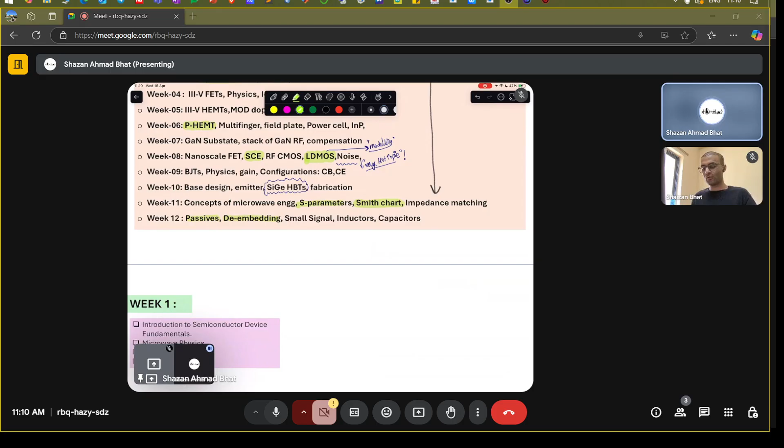Okay, so now let's say for example week one. In the week one we talked about introduction to the semiconductor fundamentals, which is again really essential to this particular course. So in this particular week, we talked about the band diagrams of the basic semiconductor devices. We talked a little bit about how you can draw those band diagrams and why those band diagrams are important.

You remember we talked about a lattice system, a one-dimensional lattice system. I'm just going to tell you how we moved from the initial point to the final point of this course so that you can have a map in your mind, like a flow chart, of how this course will wrap up, so that you can have an overview. Okay, so we started with the one-dimensional system of lattice, and then we talked about its potential.

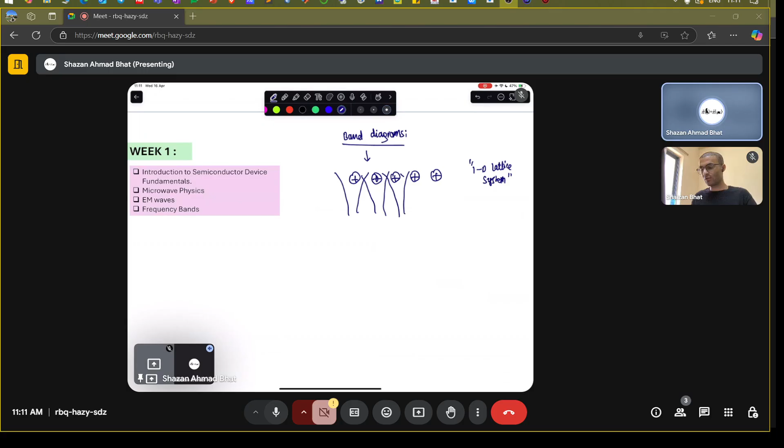This is the potential an electron will feel in presence of the one-dimensional lattice. Now you can approximate it with rectangular potential wells, and these are the ends of this particular crystal system. An electron can be, for example, here, or here. These are the electrostatic potentials felt by the electron in presence of the nucleus. Now you take one of these cells, these rectangular potential wells.

This is U as a function of R, and you solve the Schrodinger equation for it. Once you solve it, you get psi as a function of x. You invoke something called Bloch's theorem, which says that the wave function at x is equivalent to e to the power ika times the wave function at x plus a. This is the periodicity condition, which is really essential.

So it says that whatever is happening to the electron here is happening to the electron in the other unit cell, except that there is some phase factor associated with it, this e to the power ik phase factor, and that is where this k comes from. This is called the crystal momentum. Now you solve this, you get the E-k relation, E versus k. There's a difference between a crystal momentum and the actual momentum of an electron.

You might have to go again to the basic device physics course, but you can obtain E as a function of k, and you get, in the reduced zone representation, the first Brillouin zone, bands which look something like this. There should be symmetry. Now this particular band is almost completely filled.

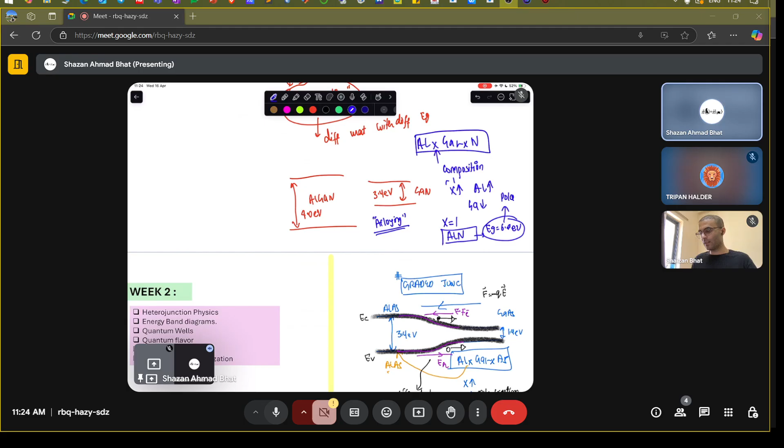Let's say you have aluminum gallium nitride, then aluminum nitride, then gallium nitride. As we move towards this side, here the x value is 1, here the x value is, let's say, 0.2, and here the x value is 0 because the gallium is 1. So by varying the composition of aluminum, called alloying, you can form a heterostructure device, wherein you can have exotic physics because there is a different band gap.

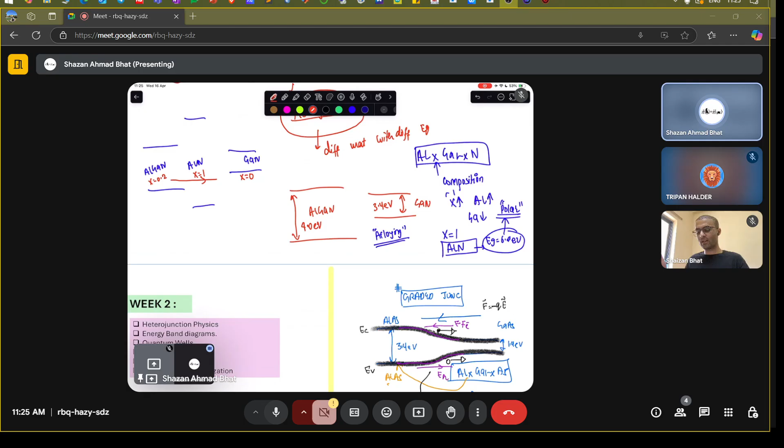The different band gap will give rise to different bendings, and different bendings will give rise to different energy states for the electrons. It will give rise to different quantum effects, where the electrons will be confined somewhere and moving somewhere, and that is the fundamental notion of heterojunction physics or heterojunction devices. Then we moved into week two, where we discussed in detail how you can form a graded junction, or how you can make quantum wells. We talked about confinement.

The basic notion was similar. If you have a system with this band gap and another system with this band gap, when you combine those two materials, there will be a band bending such that this barrier is formed, and it depends on which band gaps you are talking about. We talked in detail about how you draw the band diagram. You have to consider these points to be static initially, and then draw the band diagram accordingly. Wherever the bending takes place, you will get to know.

But whenever you draw the band diagram, the important thing is that these things are not going to change, which are the electron affinities and the band gap, although the two materials will have different band gaps. So every time you draw the band diagram, this should be the same as this. For the left hand side, the band gap should be the same. For the right hand side, the band gap should be the same. Similarly, the electron affinities should be the same, because these are material constants. Just because you are combining or fabricating them, you cannot change the material constants of the constituent materials.

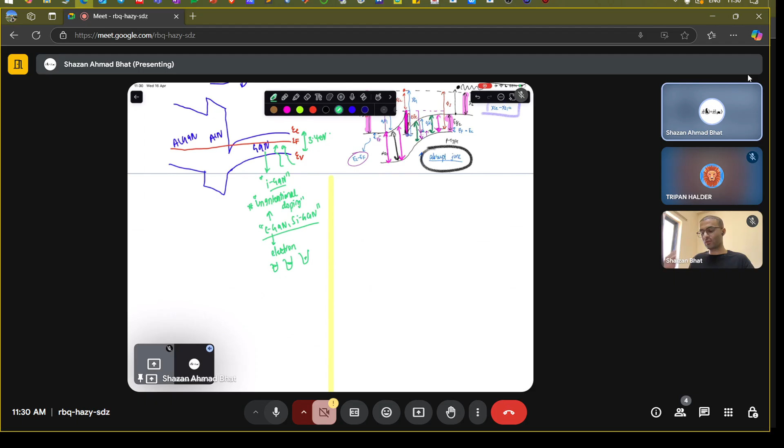So unintentional doping includes, for example, sometimes carbon gets diffused into this. Sometimes silicon gets diffused. So you have something called C-GaN, and you have silicon-doped GaN. All of those impurities come into these systems and give rise to different properties. For example, carbon-based doping produces traps that can trap the electrons, so that you don't have any conduction in this direction, because the electrons are not flowing in this direction. Electrons are present here in this region.

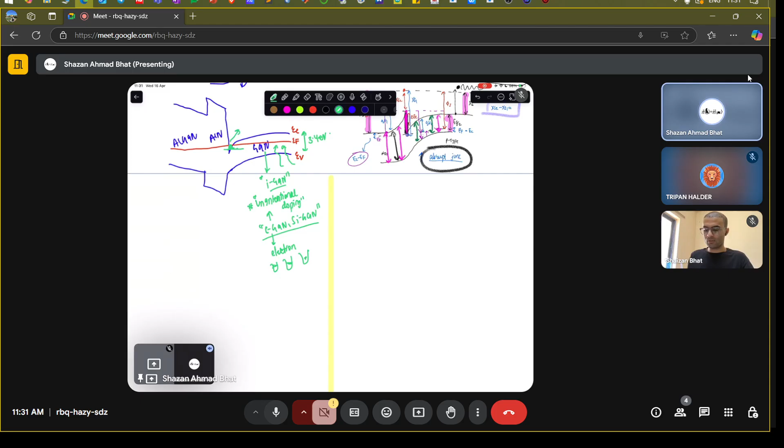This is the 2D electron gas. I've talked about why this is 2D. If you have a circular wafer, this is the top view of the wafer. And if you make a front view of the wafer, it would look something like this. This is the thickness of the wafer. So you have different layers: an aluminum gallium nitride layer, an aluminum nitride layer, then a gallium nitride layer. So this is the front view.

I'm just talking about how this looks. And this is the top view. In the top view, the 2D electron gas is present throughout. Why? Because in the front view, the 2D electron gas is present just at the AlGaN/GaN interface. The aluminum nitride layer is quite thin, almost 1 or 2 nanometers. We have talked about why this aluminum nitride layer is used and how you can do certain mathematics considering it. So this is the 2D electron layer from the front view, and from the top view it is present throughout the surface.

That means the electrons are not going to flow in this direction. The electrons are going to flow in this direction or this direction. Let's say this is X, this is Y. They are not going to flow in the Z direction at all, because there are barriers in the Z direction. This Z direction is called the growth direction. So electrons don't flow in the growth direction because there are barriers.

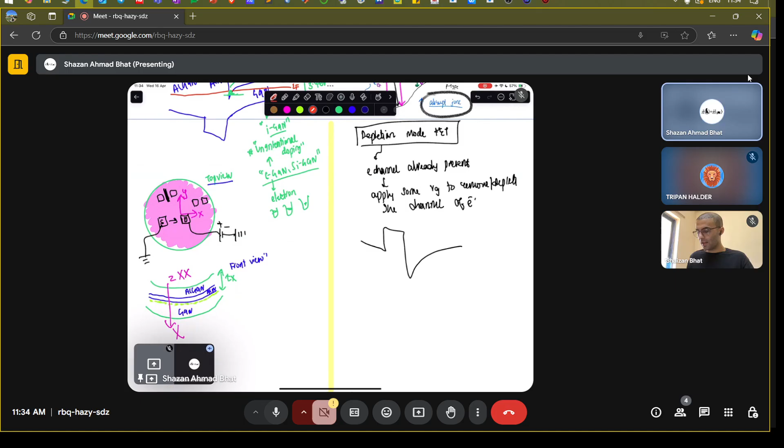What does it mean? It means that the electron channel is already present, but what you just do is that you apply some gate voltage to remove or deplete the channel of electrons. So if you have a system like this, I'm just showing the conduction band, and if this is the Fermi level, this is the 2D electron gas.

So whenever you are applying, let's say, some Vg and you are going on increasing. Basically, it's not a positive Vg, it's some negative Vg. You have to repel the electrons; this is basically the gate metal. So you have to repel these electrons away from the channel in order to turn it off. So whenever you apply the negative Vg, you basically make this go higher so that the 2D density reduces. Now this is the band diagram when you have applied a negative Vg.

Okay, why did this go up? Because whenever you apply a negative potential, the electrostatic potential energy of electrons increases, and it went up by bringing all the conduction bands up in the AlGaN, in the aluminum nitride, as well as in the GaN. So once it does so, it reduces the 2D electron density, because now you see that this particular well is shallow compared to this well. This is a very deep well. So that's why the 2D density will be huge. So the 2D density depends upon how deep your triangular potential is.

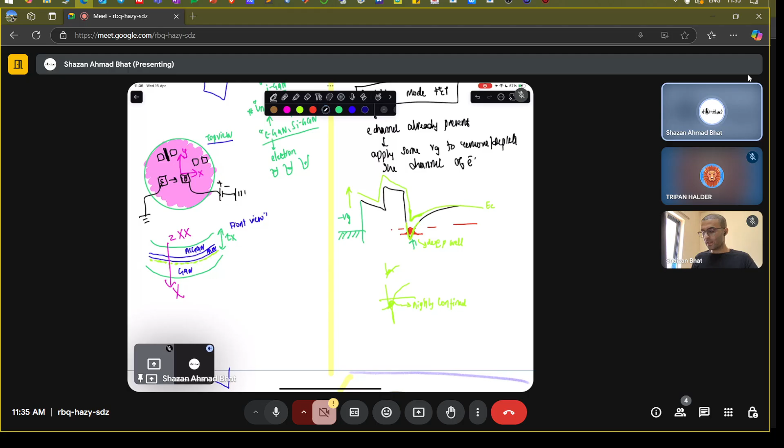A triangular potential like this is going to have a huge 2D electron density compared to that of this, because this is highly confined. Why is this confinement here? Because this potential is huge, and then there is this very huge potential. Those potentials are basically confining the electrons in these particular regions. So that's why it's called a two-dimensional electron gas.

Two-dimensional because I told you that the electron can only move in the X or Y direction. It cannot move in the Z direction. And electron gas because the electron behaves almost like gas molecules there, just like gas molecules with a certain average kinetic energy moving, just like the free electrons in a metal. You can make them move very fast. That's why they have huge mobility and make possible these high frequency devices.

One other aspect is the peak of this electron distribution. If you have a triangular well, and if this is n equals 1, which is the first quantum state, or energy state of the electron, the solution of the Schrodinger equation looks something like this, which is basically mod psi squared of x. Now you see that this particular peak, called the centroid, is away from the aluminum nitride interface by delta D.

So this delta D, we have found, depends inversely upon the effective mass. We have also calculated it. This might be one of the questions in the examination, we don't know, but this is a very important concept. This delta D is the distance of the centroid, which means the electron concentration peaks at a distance away from the interface. Let's say this delta D is 3 to 4 nanometers in the case of GaN/AlGaN HEMTs. And what does it do?

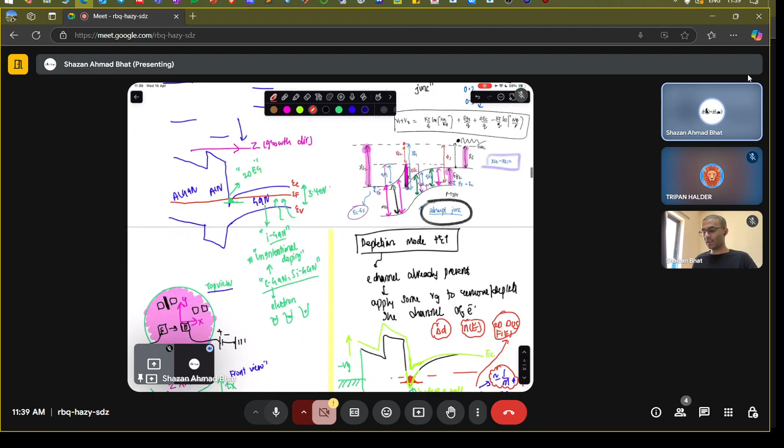You might want to go back and look at the calculation and the dependency of this delta D on the effective mass of the electrons. If you go on increasing the effective mass, this delta D goes on reducing, and so on. This is a very important concept, and highly essential for making these devices.

Now we entered into week three. We talked about some high frequency, high power devices, which are the IMPATT diodes, tunnel diodes, Gunn diodes. For example, the Gunn diode is not really a diode, it's just a bulk material, say gallium arsenide. Instead of combining p-type and n-type materials to make a diode, it's a bulk material that behaves almost like a diode system.

It gives you something called negative differential resistance. How does it do so? By something called inter-valley carrier transfer. As I talked about in the first slide, the band structure looks something like this, where these are called valleys. Let's say this is the gamma valley, and this is the X valley. These are the valleys where electrons can stay, like energy levels in the E-k space.

If the electron is here, it can move to the other valley upon certain excitation. And you know from the basics that the curvature gives you the effective mass: more the curvature, less the effective mass. So here the effective mass increases because the curvature is less. That means mobility reduces and the current reduces.

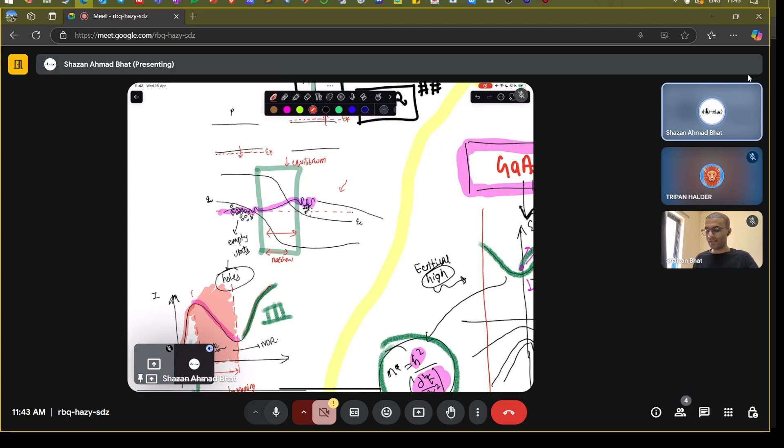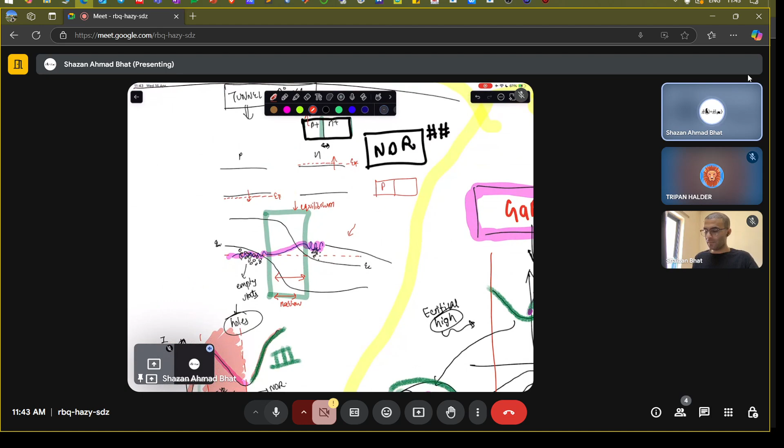As a result, whenever you draw the equilibrium band diagram, on this side, this is the equilibrium band diagram. You have a huge number of states present on both of these sides. Let's say you have this PN diode, P plus region, N plus region. Then you draw the band diagram, which looks something like this. Because the Fermi level is here, there is a huge concentration of electrons, because EC minus EF determines the electron concentration. Similarly, EV minus EF determines the hole concentration. So there are huge hole concentrations.

So the electron now has the opportunity to tunnel across and appear on the other side. This is called quantum mechanical tunneling, and it depends upon this particular distance also. This is usually narrow. Why is it narrow? Because the depletion region width reduces whenever you have highly doped regions on both sides. Now, whenever you have such an effect, you get a negative resistance again.

Initially the conduction takes place normally, but then you start to increase the voltage. This is basically a non-equilibrium scenario. It does not happen by its own; it requires the application of an external potential. When you initially increase the voltage, the current increases normally, but at a certain voltage point the current starts to reduce and you get a negative resistance. Then the current starts to increase again, after all the effects have been saturated. So this is not the regime we want. This is the actual regime where the negative differential resistance comes into picture in these tunnel diodes.

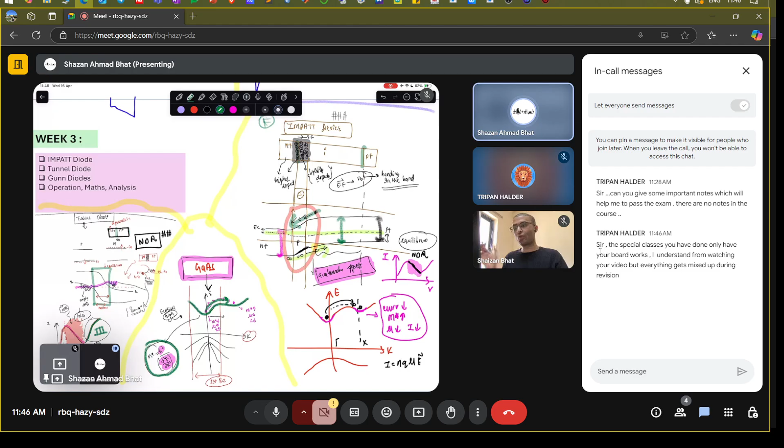Yes, I have deliberately taken some of the snips from my board work, but wherever I have not taken the snips, I'm drawing or scribbling on the whiteboard myself. I have deliberately taken them so that you can relate. Whatever I have shown here, you can go back to those notes and relate them in terms of the revision, so that you have it in an easier sense. You can revise the entire thing in one go. These are just the important aspects I have taken from my notes, not everything. Whatever we have covered in 12 weeks, it's impossible to cover in this particular session. I have just taken a few snapshots from those board works. Okay.

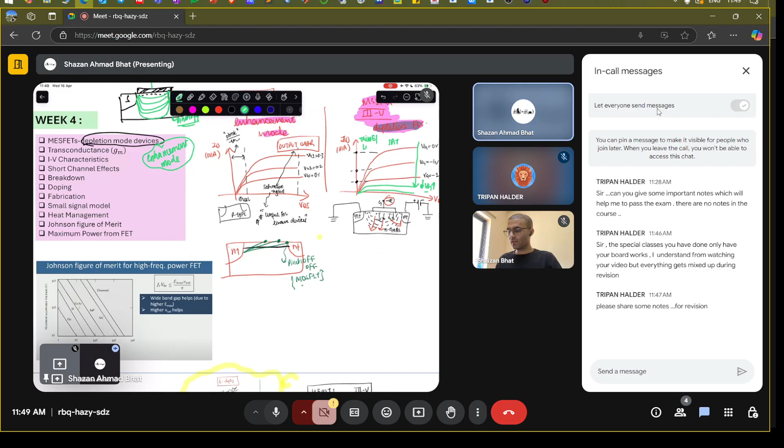So you have to apply a huge negative gate voltage in order to completely turn off the channel. And you have these regimes: the saturation regime, the triode regime, which is also called the linear regime, and then the breakdown regime. For the breakdown regime, you have ID here and VDS here.

So you have initially huge current, then you reduce it, and reduce it further. You are increasing the gate voltage in this direction, but in a negative sense. And if you go on increasing the drain voltage beyond this particular voltage, it starts to break down, so you get a huge surge in the current. In some devices, the opposite effect can happen, called current collapse. That's also an important concept that I'll be talking about.

In those devices, if you have a characteristic initially like this, as you go on increasing VDS beyond a certain point, let's say V1, you see a droop in the current. This is called current collapse. Why this happens is what we are going to see in the upcoming slides. But these are different effects: a current collapse can happen, a current surge can happen.

This mostly happens whenever you have multi-finger devices. One of the devices heats up and takes all of the current, just because of the heating effect. While this other effect is because of breakdown, avalanche effects, ionization, tunneling and other stuff. But we are going to check why these particular effects happen.

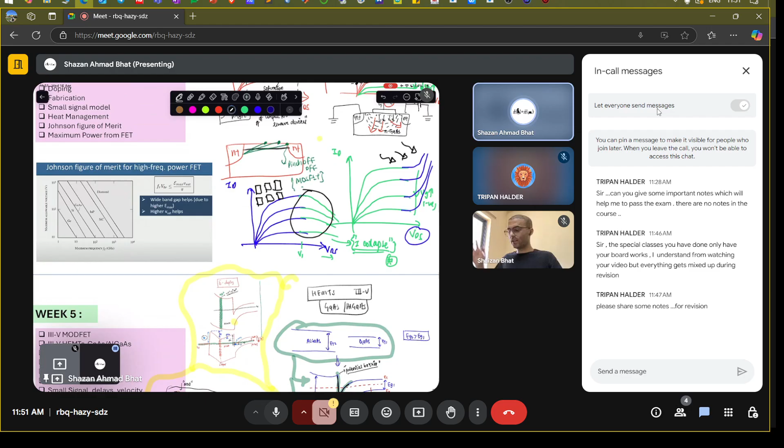These are really important effects, and I am damn sure there will be a question regarding the current collapse concept, because it's a really important concept in today's devices. Why does this current collapse happen? Now we talked about the fabrication.

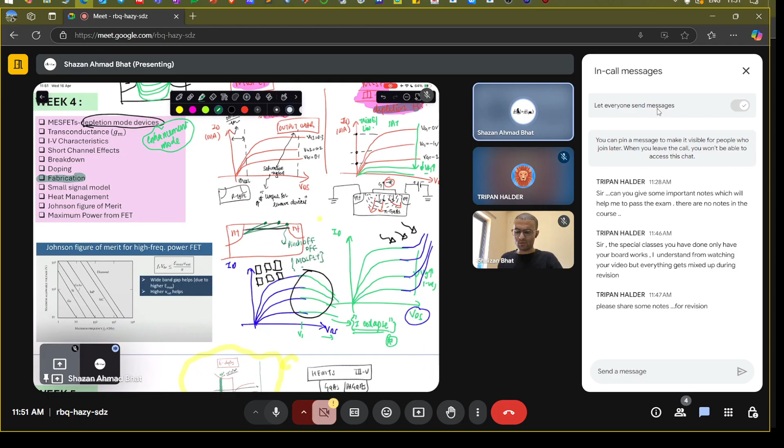That's a very deep topic. There was no such categorical question regarding the fabrication in the sessions itself. But we talked a little bit about heat management and Johnson's figure of merit, which basically gives you the maximum allowable voltage with respect to the maximum transit frequency, the unity gain frequency.

So as you go on increasing the maximum allowable voltage, you get a maximum unity gain frequency. That is the basic concept of Johnson's figure of merit. As you go in this direction, you are increasing the band gap, and as a result your device's voltage handling capability is increasing, because diamond is highly insulating compared to, let's say, gallium arsenide, which is 1.4 eV, silicon 1.2, 0.7, indium phosphide, and silicon carbide 3 electron volts.

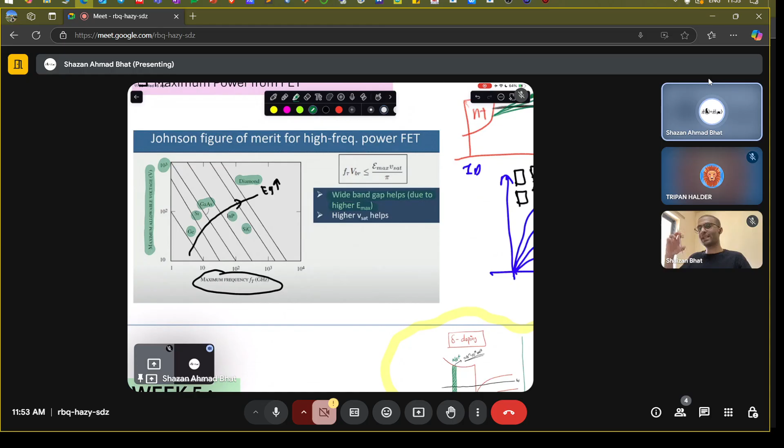So you are increasing the band gap, you're getting higher towards the higher frequencies, and maximum allowable voltage is increasing to almost 1000 volts. There is a huge advantage of using these higher band gap devices. Wider band gap helps due to higher maximum breakdown field, called the critical field. Critical field is the electric field a device can handle, and the higher the band gap, the higher the field it can handle. That is the basic layman concept of why these figures of merit are used in these devices. Then we moved into week five.

Week five was about modulation doped FETs. We talked about why we use these modulation FETs. We dope a certain region with dopants in order to reduce the scattering effects on the electrons, so that you can further improve the mobility. For example, if this is aluminum gallium nitride and this is gallium nitride, we're talking about III-V devices, you only dope this particular region, and this doping is away from the interface.

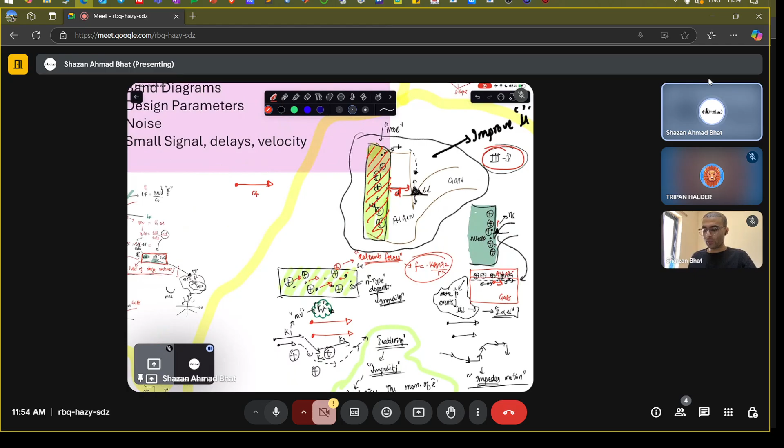What does it do? These doping centers are impurity centers, first of all. Whenever the electron moves near them, these doping centers scatter the electrons. If initially the electron was moving in this direction, and you have a doping center here, the electron moves slightly like this. That is what scattering is. You want to avoid it, because this drastically reduces the mobility, since it is like a collision event. The electron wants to move collision free. That is what we ideally want. But these impurities make it undergo collisions. With another impurity, it will go like this, and you have those scatterings in the presence of these impurities.

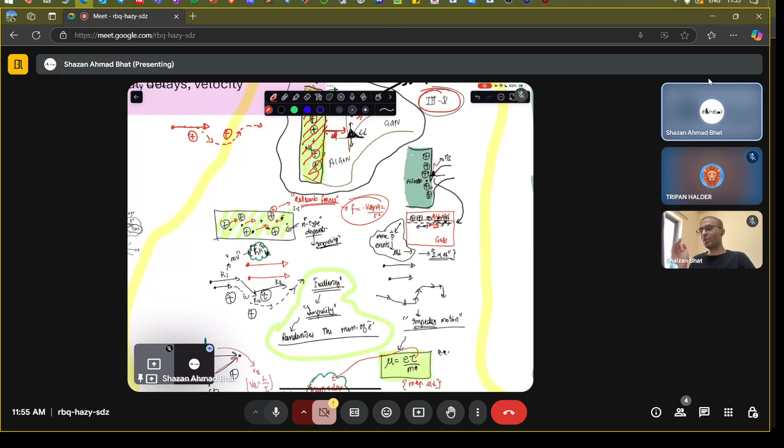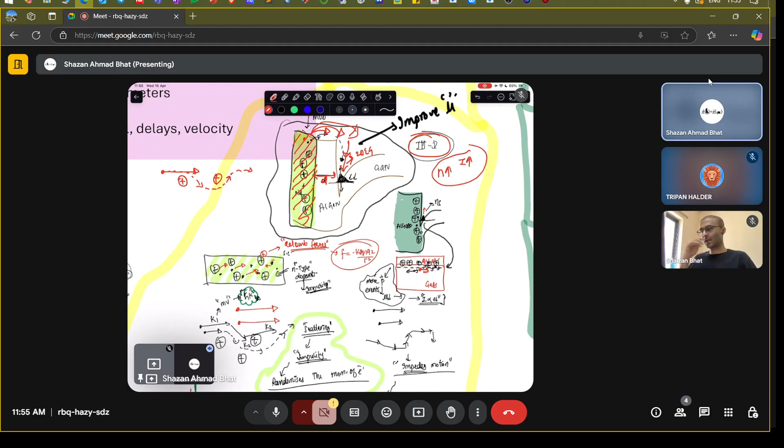In order to avoid this effect, you dope it away from the channel, away from the 2D electron gas. This is the 2D electron gas, so that you can have less carrier scattering. But there is one advantage: this doped layer can supply more electrons. Those electrons are going to remain in the 2D electron gas layer. And if you increase the concentration, you increase the current. That is the fundamental aspect. That's what we want. But there is one effect that can happen.

It's called remote Coulomb scattering. These impurities can remotely interact with the electrons, because these are charged particles, and charged particles have electric fields. No matter if you separate them by distance, they influence each other because of the electric field. If this is positive charge and the electrons are present somewhere here, there is a certain influence of the positive charge on the negative charge, because field lines coming from the positive charge have to terminate on some negative charge. This is remote Coulomb scattering.

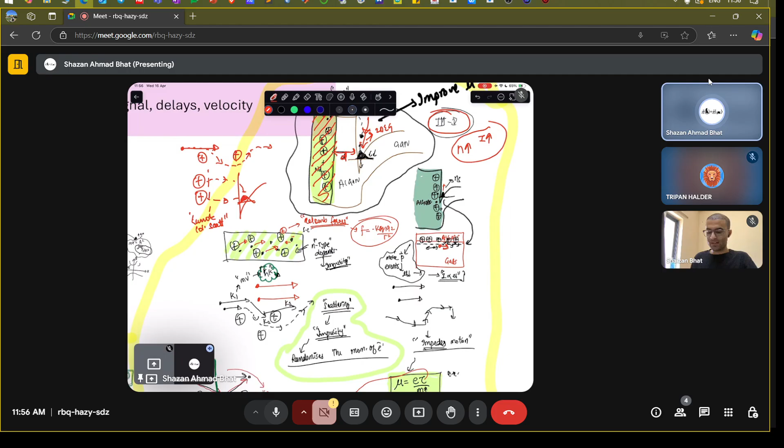This effect is always there. If you want to reduce it, you have to increase this distance d, or you have to dope very thin, which is called delta doping. In delta doping, we have a very thin strip layer of doping, so that you can have a huge concentration of electrons.

You can have a huge 2D electron concentration, and on the other hand, you can reduce these impurity scatterings, remote Coulomb scatterings, and other impurity scattering processes. And that's why if you reduce the scattering, you increase the mobility. You delta dope it, you increase the concentration. So both of these are advantageous to increase the current. So that's what we want actually.

Okay, so that is the fundamental notion of these modulation FETs or modulation field effect transistors. That is the ultimate concept of it. And this is the particular calculation I was talking about: how you compute the distance of the 2D electron centroid away from the interface. So this is the particular equation. This is very important, maybe there might be certain questions asked from it, and you can see that this distance is inversely proportional to the effective mass of the electrons.

Okay, so this is important. You can go through it. I have discussed it in detail in my lecture also, and in the notes I think I have clearly shown how you can derive it using the 2D electron density of states and the Fermi function, and the calculation is quite simple. This is about week 5. So week 5 is all about it, and these are the important aspects of week 5, which can be asked in the examination.

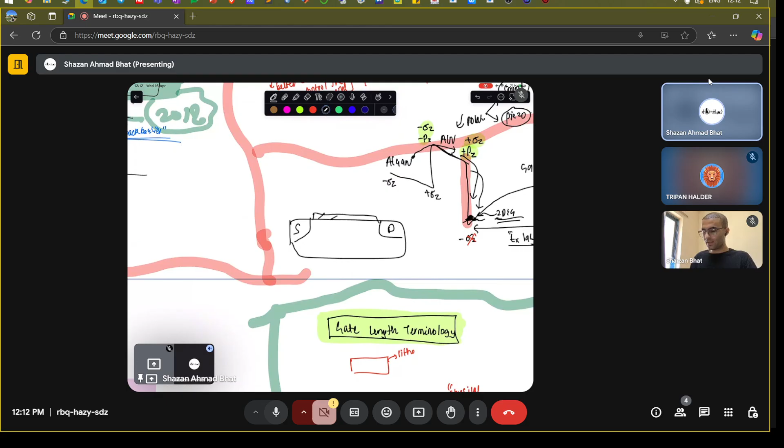Field plate technologies are just to modify the electric field profile coming from the gate and the drain. Just like if you have a device, you have a source, you have a drain, you have, let's say, some dielectric, you have some gate electrode, then you can deposit one more gate electrode over it. You can do it layer by layer. These are called field plates. Obviously, there is some separation between, so that whatever field is coming from the drain, you can terminate on these gate plates, so that you don't have a coupling of the gate and the drain.

Okay, why is this important? Because you see that these distances are very small. We're talking about nano fabrication processes. These distances are very small. You can basically engineer these electric field profiles, which are coming from different contacts, in order to terminate them effectively, so that there will be less capacitive coupling. If there is less capacitive coupling, there will be less delay. If there is less delay, you have a faster device. That is the fundamental notion of these field plate technologies.

Now we talked about certain emerging topics. One of the emerging topics was something called N-polar HEMTs. N-polar HEMT is nitrogen polar HEMT. Okay, nitrogen polar HEMT is like inverting the entire device. Let's say you have a gallium nitride wafer. If you look at the front view, it would be something like this. This is the thickness of the wafer. The top of the layer behaves negatively, the bottom of the layer behaves positively because of the spontaneous polarization. I talked about it.

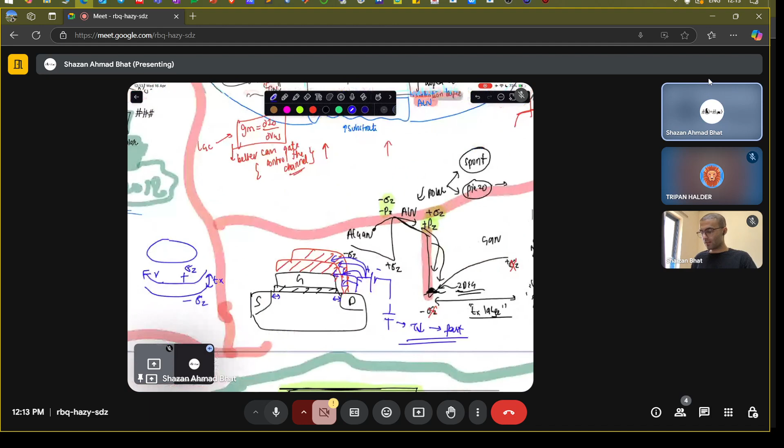Just like this thing. This is like the bottom of the gallium nitride, and this is like the top of the gallium nitride. The top behaves positively, the bottom behaves negatively because of spontaneous polarization. Now you invert this and you have something like this, negative, positive. Inverting means this has to be entirely fabricated by molecular beam epitaxy or MOCVD processes. So this is a very emerging technology in today's world.

Now you have a top surface which is negative and a bottom surface which is positive. So this is called N-polar or nitrogen polar HEMT. N means nitrogen. That means most of the nitrogen bonds will be here, and that makes the top surface appear to be almost negative. When you have such a structure, you have inverted the entire band diagram. The band diagram looked like this before. Now the band diagram looks like this. Now you have the 2D electron gas here instead of here. You see, this is like a flip.

Now, what is the essence? This is the gate electrode. Now the distance of this 2D electron charge from the gate is less, so you have better control over the channel. You can turn it on and off quickly and you have faster operation. That is the essence of these N-polar devices, and these are right now largely trending, and people are trying to fabricate these N-polar devices instead of the normal gallium polar devices. Gallium polar are the normal ones, but these are the N-polar devices.

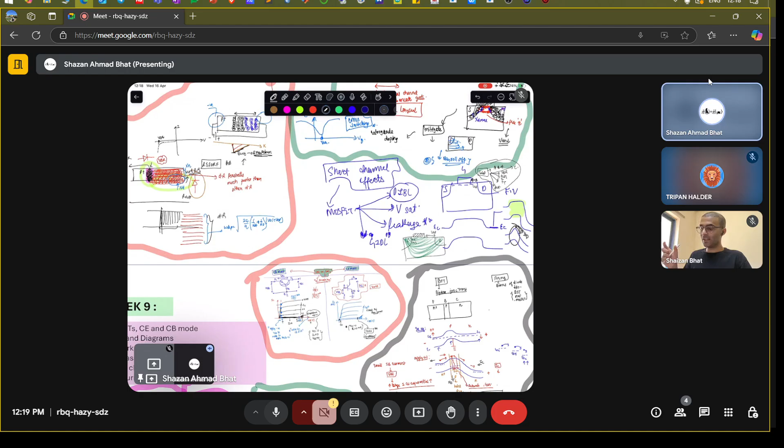Then there was something called RESURF technology. I won't go deeper into this RESURF technology again because it will confuse you a lot. I have discussed it in one of the questions that was asked in the assignment section, and there's a very huge probability that there will be a question asked from this RESURF. RESURF is a technique where you have two depletion regions, a bottom depletion region and a top depletion region, in devices like LDMOS, laterally diffused metal oxide semiconductor, which looks something like this. Okay, so you have two depletion regions. One is this depletion region, another is this depletion region. So you want one of the depletion regions to completely fill the other part.

So you want this depletion to be fast compared to that of this depletion, so that you can have a huge breakdown voltage. Once the depletion region is made, you can give a lot of voltage to that particular device, because once the depletion region is formed, the device behaves like an insulator, since there are only ions present in that region. You no longer have the free electrons there. That is the concept of RESURF. I don't know what the full form of it is. The full form doesn't matter.

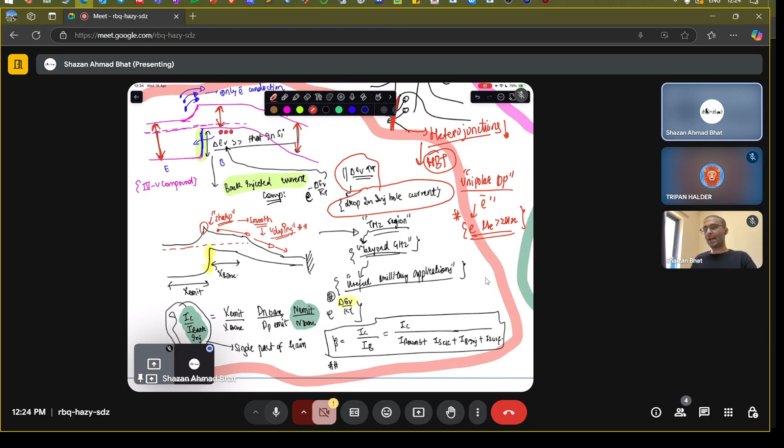So you have a drop in the injected hole current, and as a result your performance increases, because now you have a faster device. Why? Because now you have unipolar operation. Only the electrons are moving in the forward direction, and electrons are faster. Their mobility is much greater than that of the holes, and that is the essential aspect. So you want to make them unipolar as much as possible. That was the essence of moving on to heterojunction bipolar transistors.

You see how the story is making sense. We went into BJTs, we studied BJTs, but then we saw that there is a problem: you don't want the back injected component to be there. So you moved on to HBTs in week 10. There was one important concept called the Kirk effect, and this Kirk effect happens in both HBTs as well as BJTs.

This happens mostly under high injection. High injection means whenever you have very high collector current or emitter current flowing in the system. That is what these high power devices basically are. So what happens because of it? Whenever you have a huge current flowing in these devices, you have something called the base push out effect. At this particular region you have a depletion region, and if you draw the charge profile and the electric field profile, it looks something like this. This is the electric field.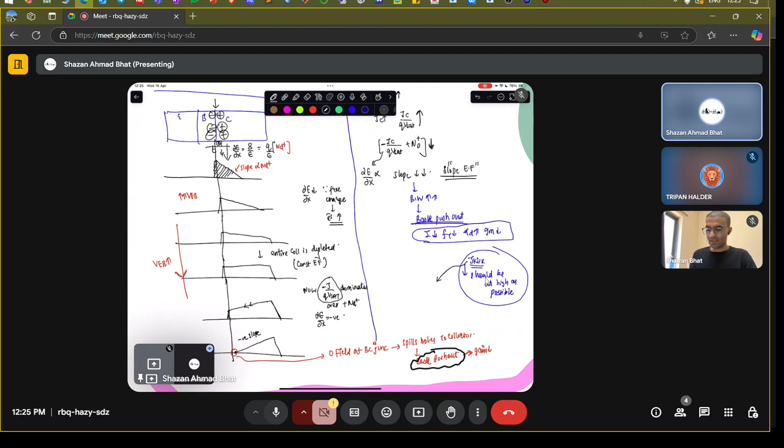Now, if you go on increasing VEB, this particular voltage, you are going to increase or reduce the slope of this electric field profile. It just comes from the Poisson equation. If you write the Poisson equation, it looks something like this, where JC is the collector current, and these are immobile charges, which are depletion charges.

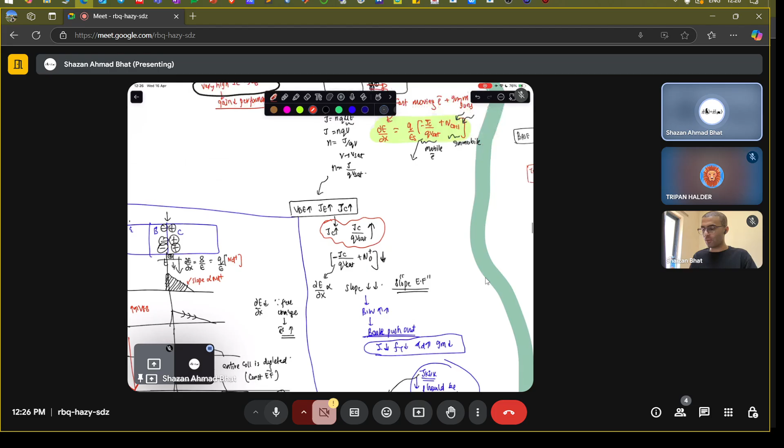So if you go on increasing VEB, the emitter current increases. That means the collector current increases. If the collector current increases, the JC by qv_sat component increases. This component. And because there is a negative sign, increasing this would mean reducing the slope. That's what is basically happening. You're reducing the slope as you are increasing the VEB.

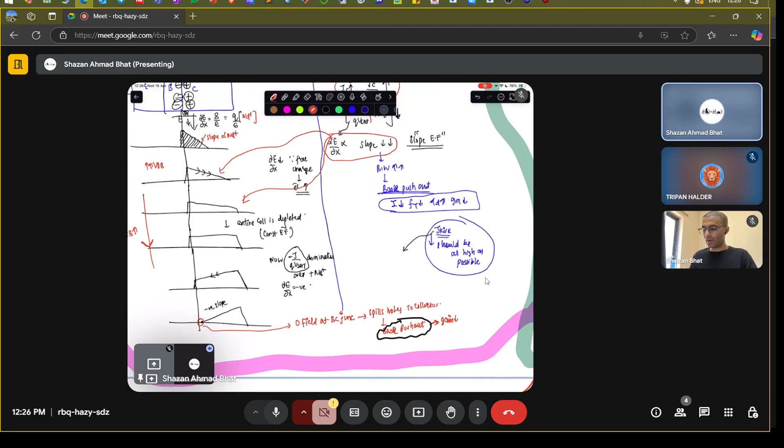Okay. So what happens is because of it, the base width basically increases. There is something called as base push out effect. Base push out decreases the current, decreases the unity gain frequency. It increases the delay. So what is base push out?

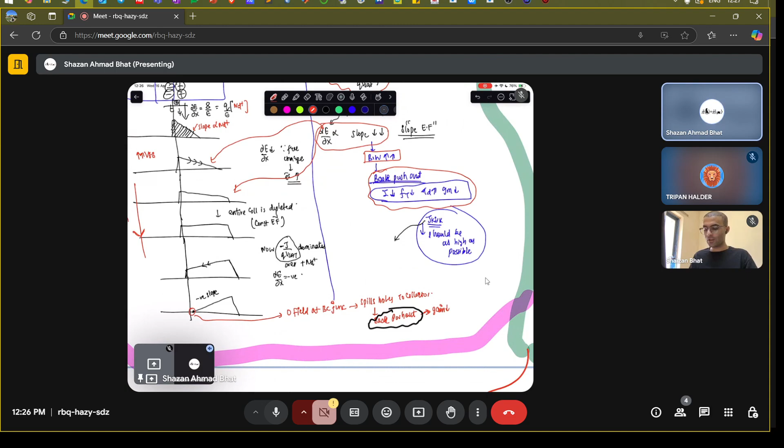So once you start to increase more and more of this VEB, you start to completely get a flat electric field profile. Okay, so the entire collector is depleted now at this point. Whenever you have a flat electric field profile, that means you have a fully depleted collector region. And that means this region is fully depleted now.

Once you start to increase it further, now what happens is the slope of the electric field starts to change because now this term starts to dominate. Okay, because now the collector was fully depleted. Now that term is gone. Now this term starts to dominate. And you have the inversion of the slope of this.

Initially, this was negative slope, zero slope, positive slope. Now the slope starts to increase. This is positive slope, and it starts to increase so much so that there is a point near the base collector junction where the electric field becomes almost equivalent to zero.

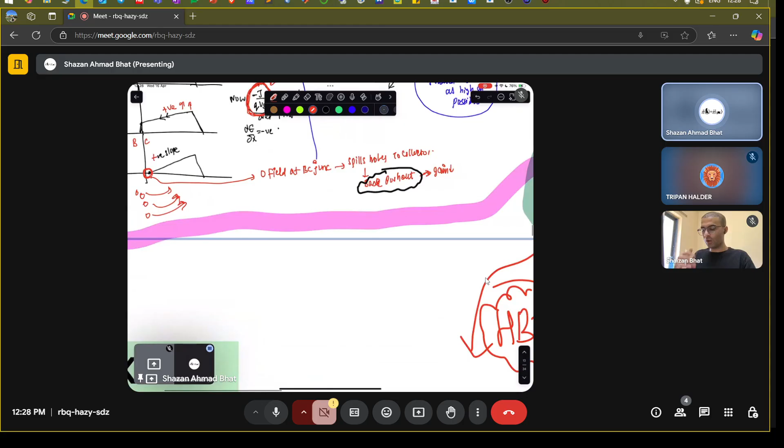Okay, and what happens because of it? It starts to spill holes into the collector region. It starts to transmit, I should say, move the holes into the collector region. So that is something called as base push out. And it is almost just like an injection of the holes towards the collector instead of the emitter. It's just like the opposite effect.

And that kills the current, because that kills the electrons. Holes are detrimental for the electrons because recombination happens because of electron hole pairs. If there is no hole, you don't have any electron to recombine with. Okay, that is the single important aspect. So that reduces the gain and that is detrimental. Okay, so that is basically something called as Kirk effect in these devices.

And now we also saw how you can basically mitigate, how you can protect your device from the Kirk effect: let's say this is the Fermi level on the emitter side, this is the Fermi level on the base side, this is the Fermi level on the collector side. You make the device something like this so that you can have electrons go here, you can have electrons go here, so there will be no base push out effect.

Earlier it looked something like this. The Fermi level was here, the Fermi level was here, and the Fermi level was here. Okay, so the electrons moved somewhat like this. Now you have to bring this particular region up. How can you bring this particular region up? You can negatively bias it, because if you negatively bias this region, the electron's potential energy rises, the Fermi level goes higher. So now you can protect your device from the base push out effect. So these are certain aspects of how you can engineer these Kirk effects.

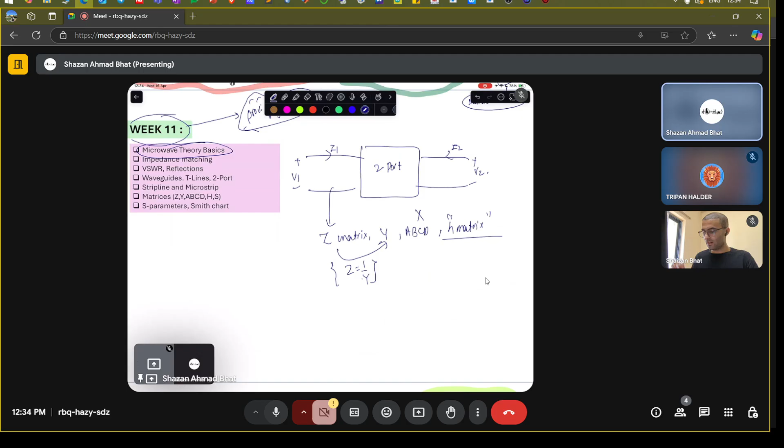So how you can define the Z matrix, the Y matrix, the ABCD matrix, and, let's say, the H matrix. These are just like inverses of each other. And ABCD and other higher matrices, also the S matrix, which is basically the S parameters, have been discussed in week 11. But the essential important concept is the S matrix as well as the Z matrix and Y matrix.

Because using this S matrix, you can form a matrix which is S11, S12, S21, S22. These basically determine the reflection and transmission coefficients of a device. They are essential because if you have a device and microwave coming in, this is incident microwave, you have some reflection of the microwave and some transmission of the microwave.

So these coefficients tell you mathematically the ratio of reflected to incident, the ratio of transmitted to incident, the ratio of transmitted to reflected. It is just a mathematically convenient way of defining these ratios. That is what these S parameters give you. We have discussed these S parameters, and we have discussed waveguides, strip lines, and microstrips.

So we discussed that if you have a substrate with certain permittivity epsilon, with certain thickness h, and a metallic strip over it having width w, then this acts like a microstrip line. A microstrip line is just like a waveguide, so if you feed the microwave, it travels along this.

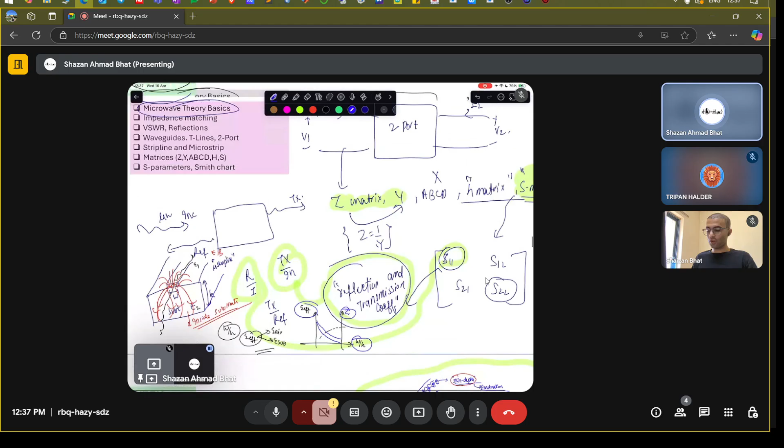This is the same theory as in microstrip antenna theory or microwave propagation. That is the same aspect of what happens in these microwave devices. Okay, that's what we covered. We also covered Smith charts, which are very, very essential in these devices.

A Smith chart is just like going from a Cartesian system towards the circular polar coordinate system, where you define inductances, you define capacitances. So it's like a polar plot. But it's an art to read these plots.

So you have certain impedance lines, and other lines which define the admittance and the impedances of the microwave system, from where you can obtain the inductances and capacitances. Resistances are mostly not shown because they are lossy components.

Okay, so knowing this, you can actually obtain the inductive impedance, which is basically the reactances. This is omega times L. This is 1 over omega times C, the magnitude I'm talking about. So the Smith chart is essential. Maybe there might be a question or two. There is a higher possibility that there may be two questions from the Smith chart.

I'm just guessing, but this is really essential, because you might be given a Smith chart and a point on it, and you have to accordingly locate the point on this particular Smith chart. And there are two types of it. There is an impedance Smith chart. There is an admittance Smith chart.

The admittance Smith chart is just like the opposite of the impedance Smith chart. If you make the impedance Smith chart just like this, you make the admittance Smith chart on the opposite side. That is the fundamental thing about these Smith charts.

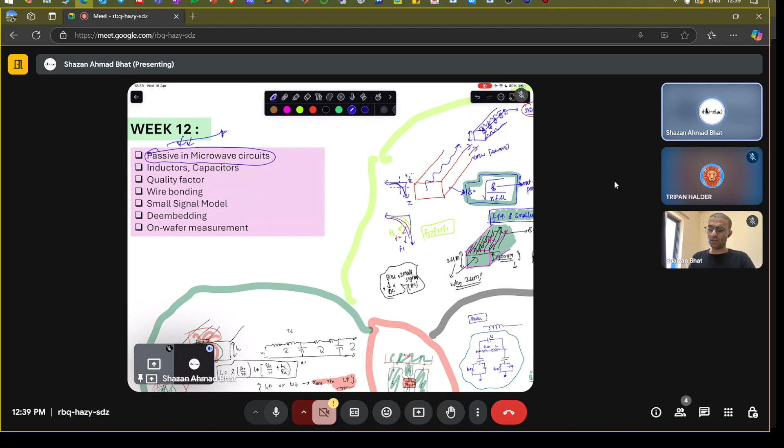Okay, now we moved into week 12, which was mostly about the passive devices in microwave circuits. Passive devices are components which ideally don't consume any power or don't require an external energy source. Those include inductors, capacitors, wire bondings, and other components apart from the active device which are present there.

So let's say, for example, if I make it like this, this is the active device. Then you have these metallic pads, which are the ground pads. Then you connect, let's say, a drain pad. You have a gate pad. This is gate, this is drain, this is, let's say, source. These are grounds.

If this is the active area, then you can connect certain wires, wire bondings. These are all included in passives. Except the dark blue region, that is the active device, all other things are included in the passives. And the important thing about these passives is that they bring inductances, capacitances and resistances into the circuits.

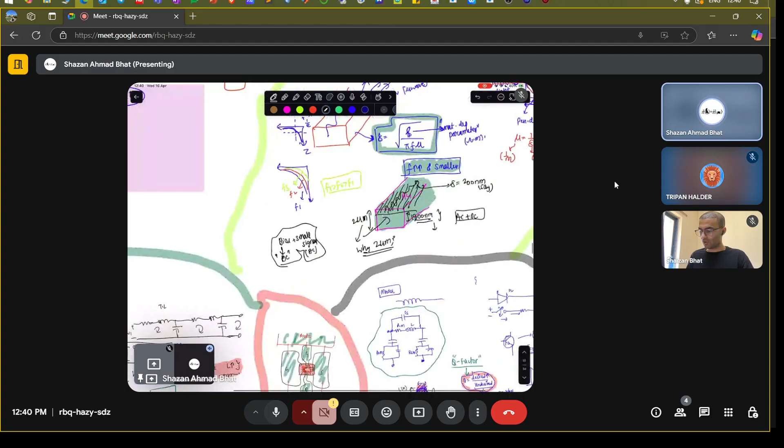Okay, so whenever you draw the equivalent model, you have to model it as inductor, capacitor, resistor networks. That is what is shown here. Let's say you have an inductor; you can model it using this equivalent circuit. Inductors have resistances because of the metal, and capacitance because the inductance wires are closely spaced with certain separation, so you always have a capacitance.

Okay, and for how those inductors are made at the microfabrication level on an MMIC, you have something called spiral inductors. We also talked about it. The spiral inductors are really essential in order to couple the microwaves. They also give rise to capacitances and resistances, and inductances are always inherent to them. So you can model those spiral inductors as well. And then the important factor we talked about was the Q factor in these devices, which is the quality factor.

It is the ratio of something desired to something undesired. You might have studied quality factor in other aspects like in resonance, and maybe that was in class 12th. But quality factor, in layman's sense, is essentially something you desire and something you don't desire.

And we talked about something called self-resonance frequency. It is the frequency beyond which an inductor no longer behaves as an inductor. It almost behaves like a capacitor. That is weird, but that is what happens. That means the inductance becomes negative beyond this point, and the quality factor drops significantly. At exactly the self-resonance frequency, the quality factor becomes zero, then it starts to reduce. That is the fundamental aspect of the quality factor.

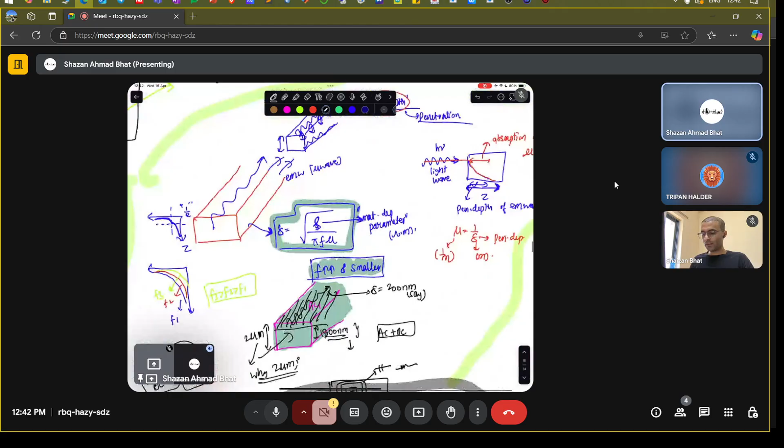We talked about skin effect. Skin effect mostly happens with alternating currents and alternating voltages. Particularly, we are talking here about microwave signals, which are electromagnetic wave signals. This effect happens in these signals because a back EMF gets developed, and that makes the current flow on the outer periphery of the device. There is only a slight depth up to which the current can penetrate into the device. That is called skin depth, and skin depth is a function of frequency.

If you have nearly zero frequency, which is basically DC, skin depth is, I should say, infinite. That means the entire conductor conducts. If you feed a conductor DC, the electrons or the current move in the entire conductor. Instead, if you have AC, then only the outer peripheral regions mostly dominate the conduction or the current flow.

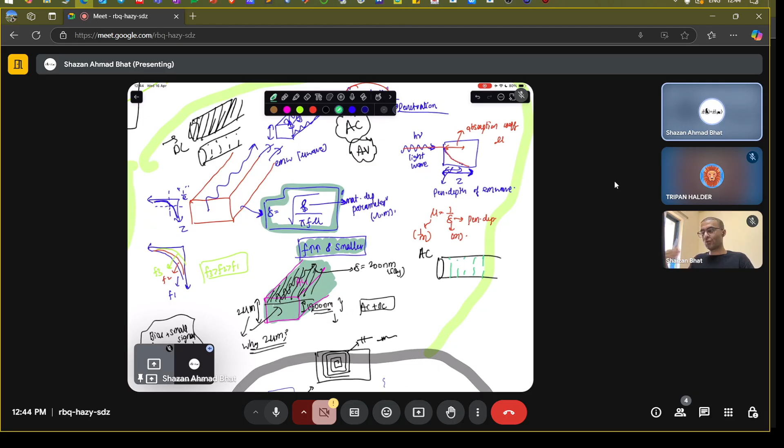If you have some wire carrying AC current for years and years, you mostly see that there is wear and tear, or the wire starts to degrade, only on the external surfaces. If you open the wire, the internal portion, the bulk region of the wire, is almost completely new. The reason is the skin effect. The AC mostly flows on the surface of the conductor. That is the essence of skin effect.

And we ended this session with the de-embedding concept. De-embedding is where you consider only the active device and you subtract the parasitic effects of all the external devices connected to it. You subtract their resistances, inductances, and capacitances. You only consider the resistances, capacitances, and inductances of the active device. Whatever is on the periphery, you remove from your calculation. That is the concept of de-embedding. That is where we finished.

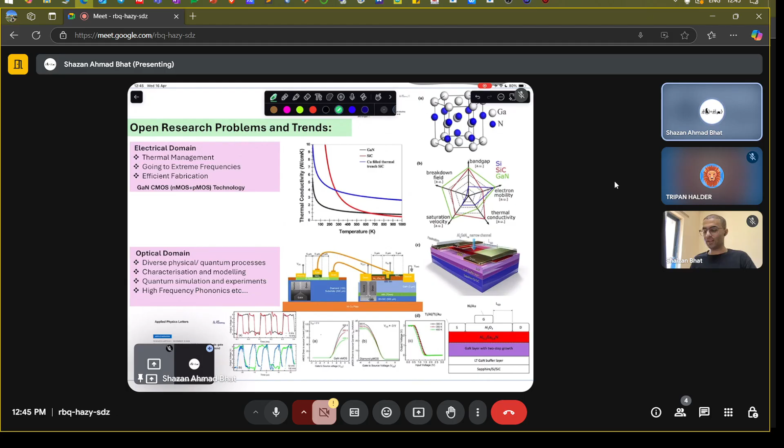Now we are into the research problems and trends in microwave devices. What are the current trends? Where are people working internationally as well as nationally? There is no doubt there is a huge interest in these microwave devices because they have applications in defense, in the commercial domain, and in tactical domains. Where are they required? They are required in radar.

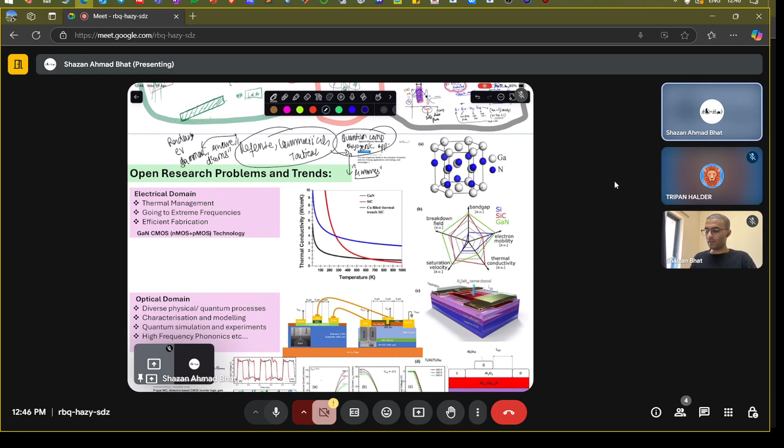They are required in EVs, electric vehicles. They are required in jammers, which are components which jam the signal. They are required for antennas; they are not antennas directly. They are required for microwave signal processing. They are required for drones, and they are also required for quantum computing, let's say some cryogenic applications, because in quantum computing you also require microwaves. You know why? I won't talk about it.

If you have a system where you have a qubit, okay, qubit is like you play with the spin of the electron. Let's say, for example, you have a spin up electron, you have a spin down electron. Now, how do you change the spin of the electrons? You change it by giving a microwave signal at certain frequency. This frequency depends upon what is the tuning frequency of the spin, something called as Larmor frequency, Larmor precession, Rabi frequencies. They are the quantum mechanical concepts.

Let's not go into that. That frequency exactly matches with those particular frequencies, spin tuning frequencies. And you can basically flip the spins. You can make it up spin, you can make it down spin. Once you play with the spins, you can have this qubit control. And here you have a microwave thing. And how do you generate the microwave and how do you control the microwave?

There is the microwave device. And what are those microwave devices? They again go into this particular section. What microwave systems you use, whether you use gallium nitride, aluminum gallium nitride, GaN, AlGaN, HEMTs, all of those devices are going to be used in it. And why the cryogenic application? Because cryogenic means extremely low temperatures. Because these quantum applications right now are controlled at very low temperatures.

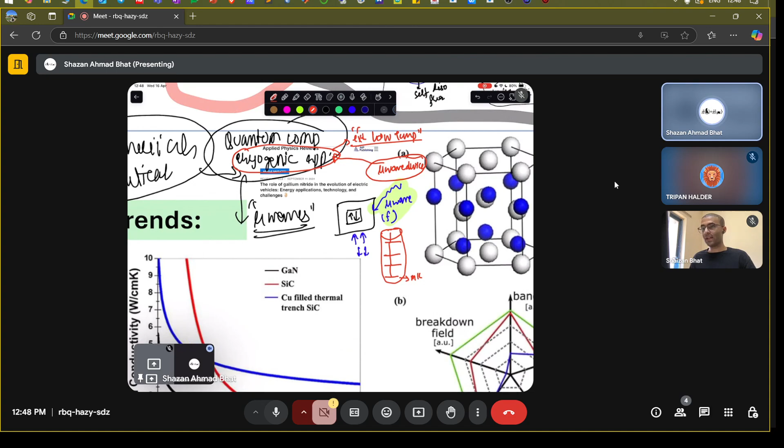You might have seen those large, something called as dilution refrigerators. There are disks present in that, and the final temperature of the disk is approximately in the millikelvin range. So that's why you want your device to work in that millikelvin range without any degrading of the performance. So cryogenic microwave electronics is currently a very hot topic of research. People are just fighting to work on this particular topic because it's having direct impact on the quantum applications.

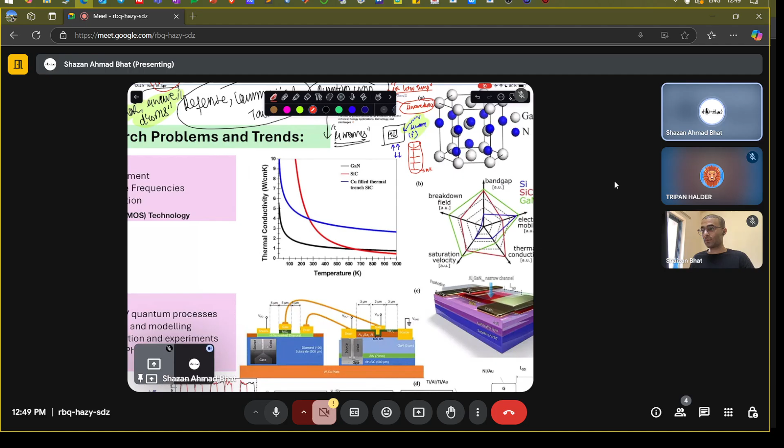And also people are all the time working on these applications because they want to work on higher and higher frequencies, let's say beyond 100 gigahertz or beyond 200 gigahertz frequency. That is essential for these defense and commercial applications. There is also one more aspect in terms of using different substrates, studying those substrates. What is the effect of using silicon carbide substrate on the thermal conductivity? Thermal conductivity is how well the heat can be dissipated in these devices.

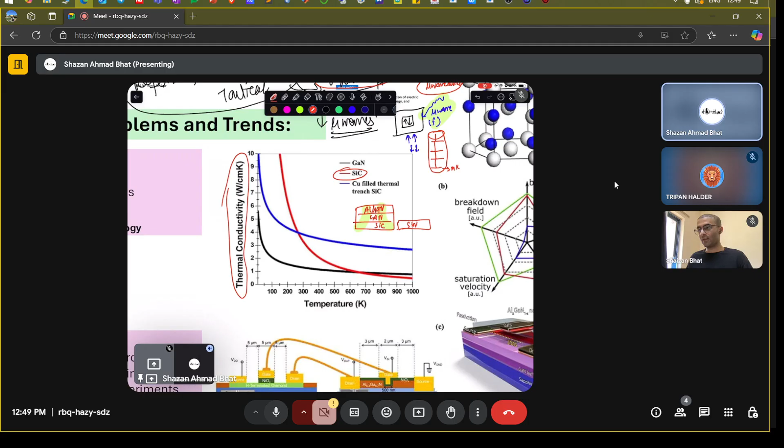Just like if you have, let's say this is AlGaN, this is GaN, this is silicon carbide. If you use silicon nitride instead, what is the effect? Okay, it can give you different effects in terms of thermal conductivities. If the silicon carbide is having better thermal conductivity, it can take away the heat more efficiently. Okay, that will be good for your device. You want the heat to be dissipated as fast as possible. And this is one aspect of studying the substrates, studying the materials.

Another aspect is studying these interfaces, because there is something called as interfacial thermal resistance. It is how the heat gets transported from these interfaces, because these interfaces are just like barriers to the transport of the heat. Because this AlGaN is having thermal conductivity K1, GaN is having K2, silicon carbide is having K3, different thermal conductivity values. So accordingly, the heat flow will be different in these different layers. So how you can efficiently get the heat out from this device is a basic challenge.

That is a very open area of research, because it almost boils down to how something called as phonons behave, something called as interfacial phonons behave. Because those phonons are basically transporting the heat in these devices. Okay, phonons are just like quantized lattice vibrations. So how phonons behave at the interface is the current hot research topic, and it always has been, because it's very difficult to understand these phonons at the interfaces. Okay, what happens to the phonons at the interfaces is very, very essential.

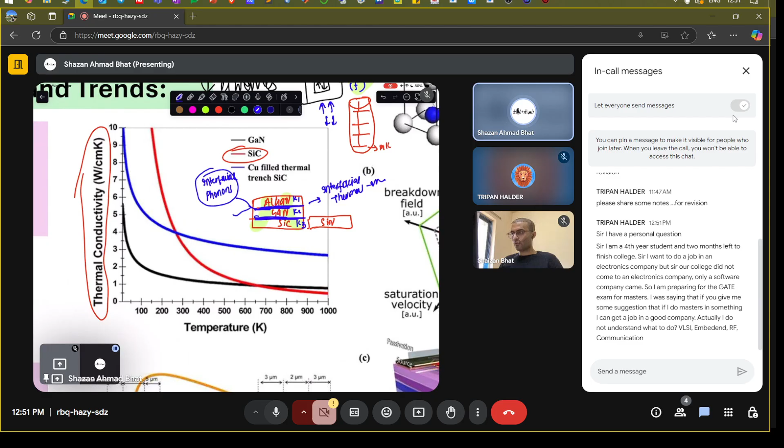Yeah, you have a question, ask me. Sir, I'm a fourth year student and 2 months left to finish college. I want to do a job in... I will answer your question. Just give me a moment. I'll just finish it, then I'll get back to you in a moment. Okay? Just give me a moment. It's a very detailed question.

So this is one aspect. Now another aspect is looking into something called as CMOS, GaN-based CMOS technology.

Why is this essential? Right now, we don't have GaN-based CMOS. We have silicon CMOS. CMOS is combining the NMOS and the PMOS for your digital applications. You make your gates, logic gates, and you do all the computations in ones and zeros. Silicon rocks there. You cannot replace silicon in the CMOS technology, not at this stage right now. But people are trying to work on this technology.

Basically, you require faster switching applications. Switching: if you want to go from 1 to 0, 0 to 1, you want it to be as fast as possible. This is 1 0 1. You want this to be as fast as possible. As fast as possible means you want to be in the high frequency regime, high frequency switching. Let's say 5 gigahertz, 4 gigahertz.

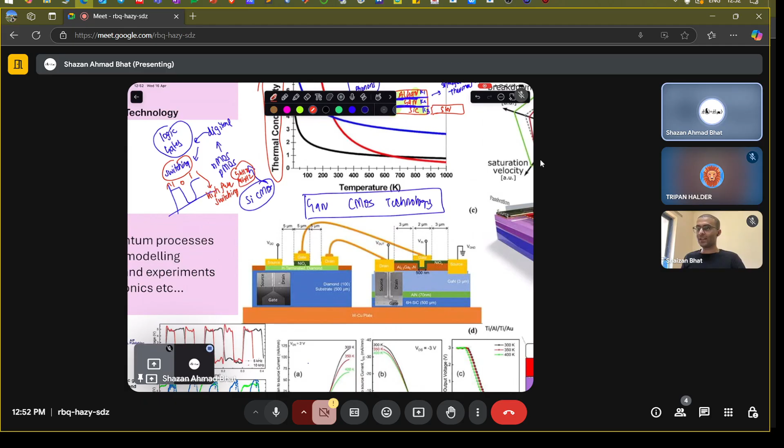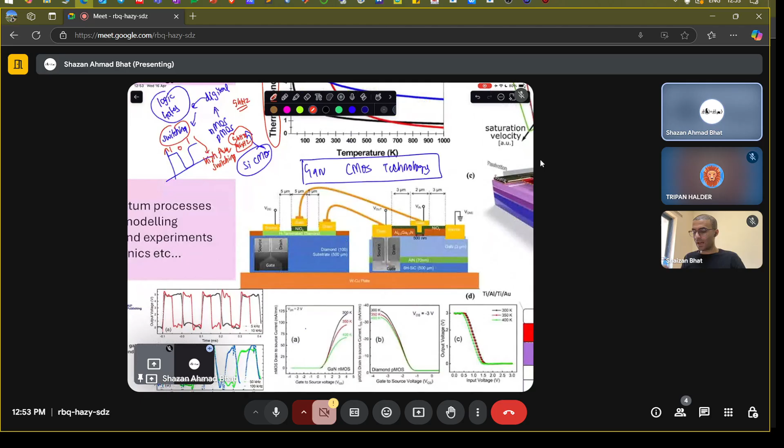That is what your clock frequency currently is, not in your mobile phones, in your computer chips. You might have seen the NVIDIA chip or Intel chip that basically works at 5 gigahertz clock frequency. That is basically the switching speed of those digital devices. It is difficult to achieve in GaN right now. GaN-based CMOS devices are not, I should say, practical in today's world.

Why? One of the important things is because you only have n-based GaN right now, at least. N-based means you have a channel of electrons only. You don't have a channel of holes. It's very difficult to get in GaN. If you remember, this is AlGaN, this is GaN, and this was the 2D electron gas. 2D electrons. So that's why this is N-based. This acts like an electron channel.

You want another system where you can have a 2D hole gas. You should have something like the opposite of this. Let me show it like this. This is the conduction band, this is the valence band. You should have a region somewhat like this so that you can have holes here, so that it can form a 2D hole gas. Why is it essential? Because this will act like an N-type, this will act like a P-type. So now you have a CMOS, complementary metal oxide semiconductor. You can make a CMOS.

CMOS is made by using a P-type device connected to an N-type device, and you can have a CMOS technology. This is P-type, this is N-type. You have the holes in the channel here, you have the electrons in the channel. This can act like a logic gate. If this is the output, if you give in 1, you will get 0. So this acts like a gate. That's why you require both P and N type here. The operation is deeper than that; you might have studied it in your basics.

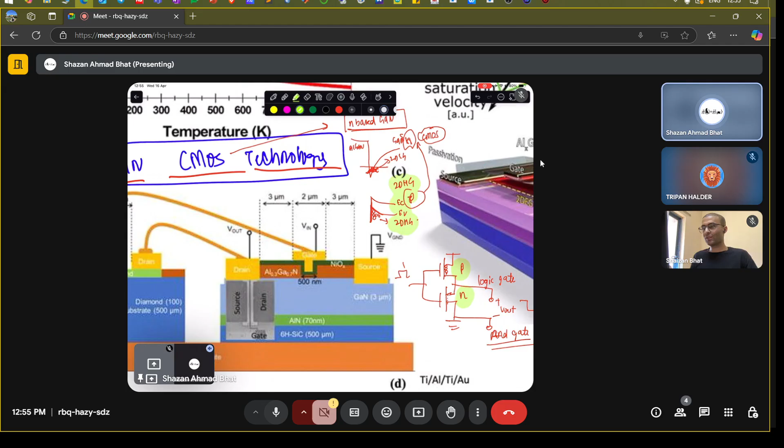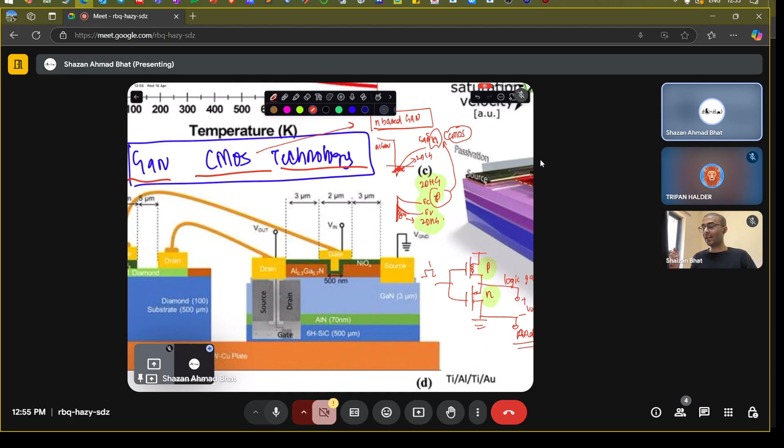But in gallium nitride based things, you have a difficulty in getting the 2D hole gas. You cannot get a hole channel. Certain techniques have now come up, but they are not promising. So what people are doing, they are using gallium nitride as an N-type device, but they are using diamond as a P-type device. Diamond has an essential quality that it has a 2D hole gas. For example, diamond has a huge band gap, I think of the order of 5.5 electron volts.

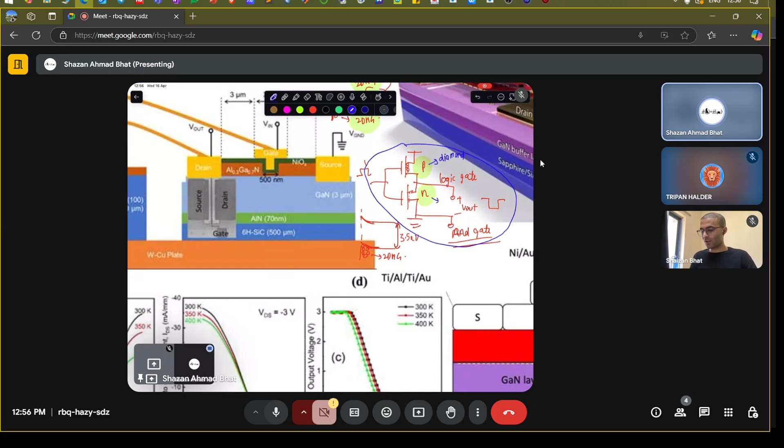The surface of the diamond behaves like this. It's bent upwards, and there is a hole concentration here. It's like a 2D hole gas. So now you can combine the diamond field effect transistor and the gallium nitride field effect transistor in a CMOS technology, just like this. If this is made from diamond, and the substrate of this is made from gallium nitride, you can make a CMOS. That is what this device is basically showing.

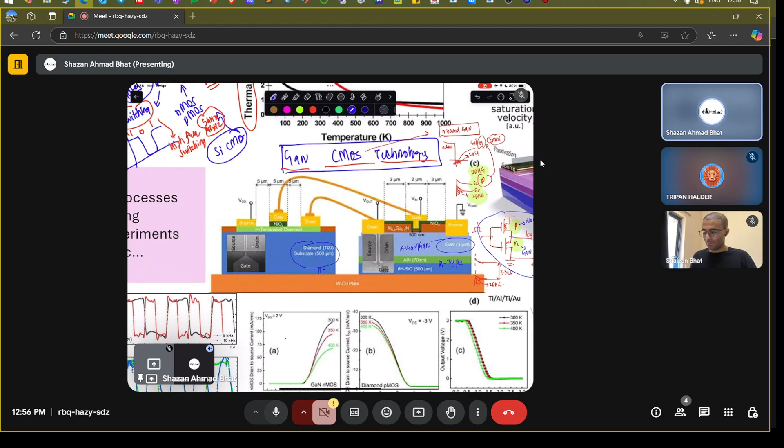This is the device. You see, this is diamond. This is gallium nitride. So this is a GaN-based device, which acts like an N-type. This is P-type. So you have a CMOS. This is actually from our device group, which is the Applied Quantum Mechanics lab group. They made this device last year, and this is basically CMOS technology.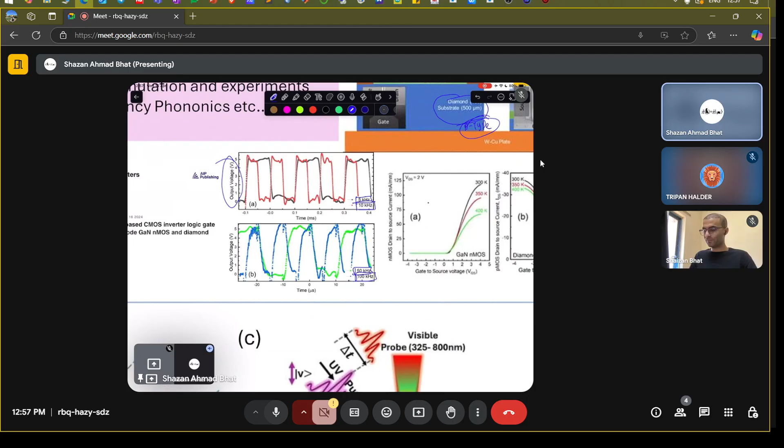Now you can see how the output voltage is varying, but the frequency is still low. It's like 5 kilohertz, 10 kilohertz, 50 kilohertz, 100 kilohertz, but it's a good beginning. You see the switching is happening at 100 kilohertz frequency, and these are the characteristics of those devices. So this is a CMOS made up of GaN and diamond. These are trending research topics right now.

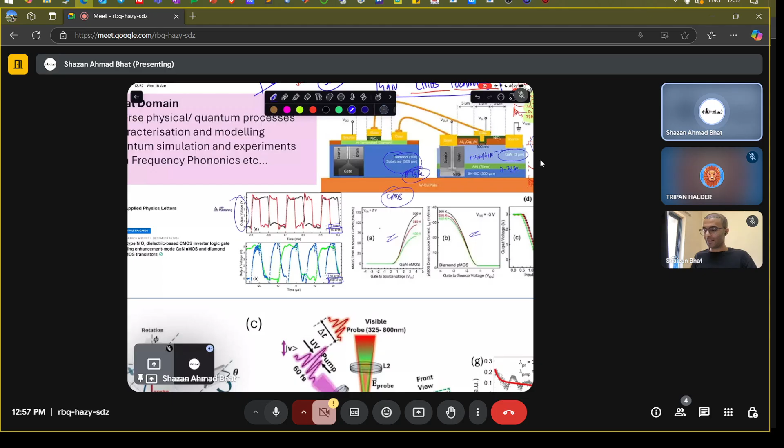And now, what are the others? This was all in the electrical domain, whatever I talked about till now. Now there is another domain, which is called the optical domain.

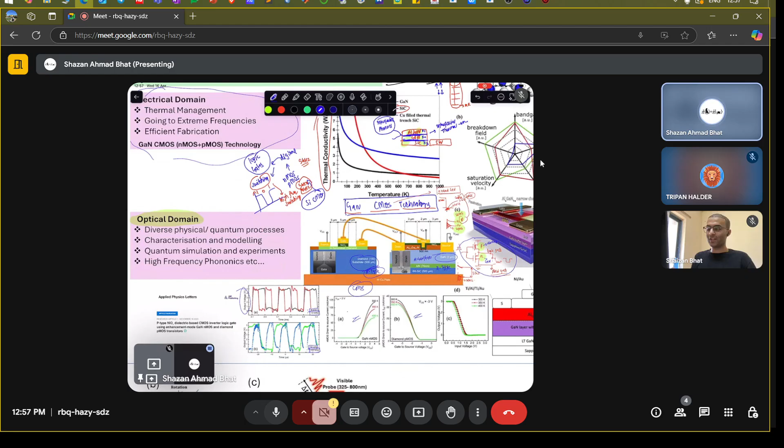Optical domain is a huge opportunity for people in research. It is much greater than electrical domain because in optical domain you have the ability to study the quantum mechanical processes. You have the ability to make optical devices, just like optical waveguides. You have the ability to make lasers. You have the ability to make LEDs. You have the ability to make displays.

You have the ability to study the quantum processes. You have the ability to model those processes. You have the ability to study phononics, high frequency phonons. I'm talking about gigahertz phonons or terahertz phonons. So you have immense opportunity in the optical domain.

Only a few people, in India at least, are working in this optical domain because it requires a very sophisticated lab as well as sophisticated optical characterization techniques. It requires something called femtosecond lasers. It requires ultrafast lasers. It requires ultra-cooled systems. It requires cryogenic systems in order to do the experiments.

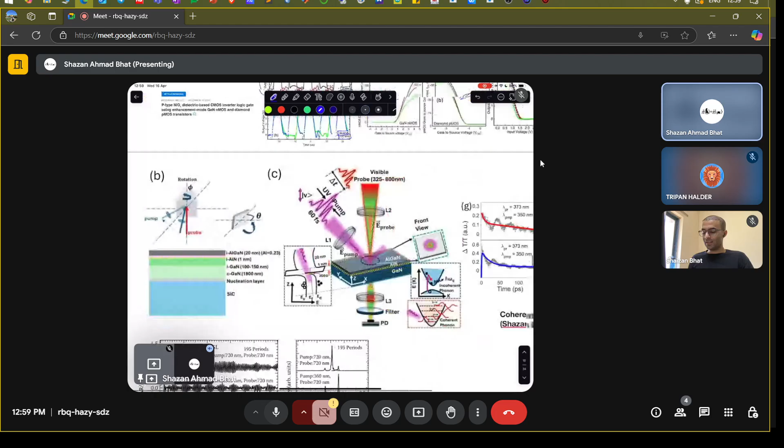And then for the modeling, it requires high performance computing systems, because modeling the quantum processes is computationally heavy. Now, what I am talking about in optical domain, this is actually my area. I'm not showing it completely because this work is not published yet. So I'm just giving you a flavor of it.

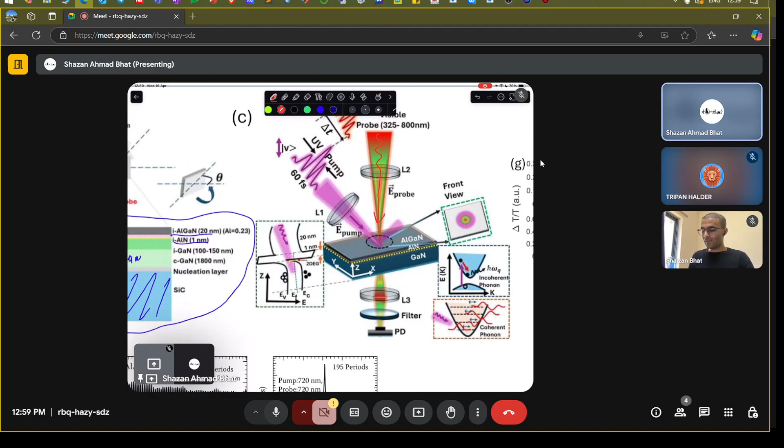If you have a device which has aluminum gallium nitride, aluminum nitride, this is GaN, this is C-GaN, which is C-doped GaN, then this is silicon carbide, you can use something called the pump probe technique. In the pump probe technique, you shine this light first.

This is called the pump, and the pump is a laser with a pulse width of almost 50 femtoseconds. So you see how small we're talking about, 50 femtoseconds. You cannot imagine how small this time is. You shine it on the system, AlGaN/GaN there, and you excite the electrons in it. And with the electrons, all of the processes happen.

Whenever the electron gets excited, it goes higher if the energy is greater than the band gap energy. If this is Eg, if hν of the incoming light is greater than Eg, this portion is the kinetic energy of the electrons. Once the electrons want to come back to the bottom of the conduction band, all of those processes that happen here are called intra-band processes. You can study them and see what is happening to the electrons.

So there is scattering happening. There are phonons getting released. There are optical phonons, there are acoustic phonons, and there are other processes as well. You can also compute the deformation potential I talked about. You can compute the piezoelectric potential. A whole lot of opportunities open up. I'm just giving you a layman overview.

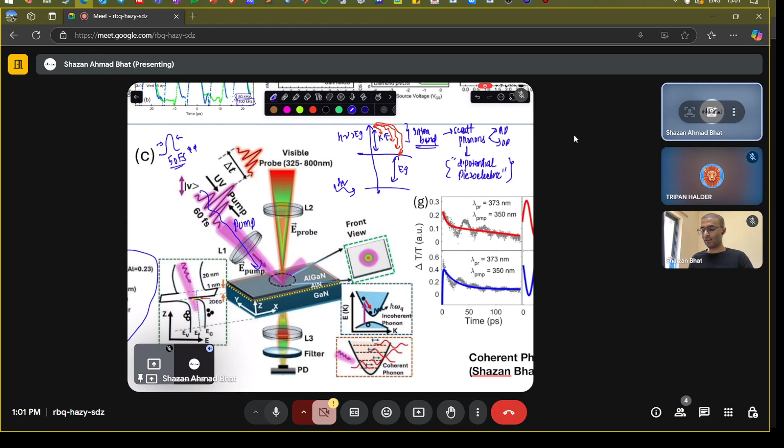Now you can make a device where you can control these processes at a femtosecond scale. Once you excite this with a pump, you bring another laser, called the probe, that probes the dynamics of the electrons inside the system. It is just like you have a box, you are exciting it with one laser, the pump, and you are creating a non-equilibrium population of electrons.

Then you bring in another laser, the probe, and the probe gets transmitted. Then there is a detector, there is a polarizer, there are all sorts of things. Then you have the signal processing systems. Then this probe basically studies the dynamics of the system.

Okay, this is always an open research problem, because people have just started to understand what happens in these devices. So now with the help of it, you can study 2D electron gas, you can study energy levels, you can study phonons, you can study electrons, you can study quantum processes, you can study all of those things using this process.

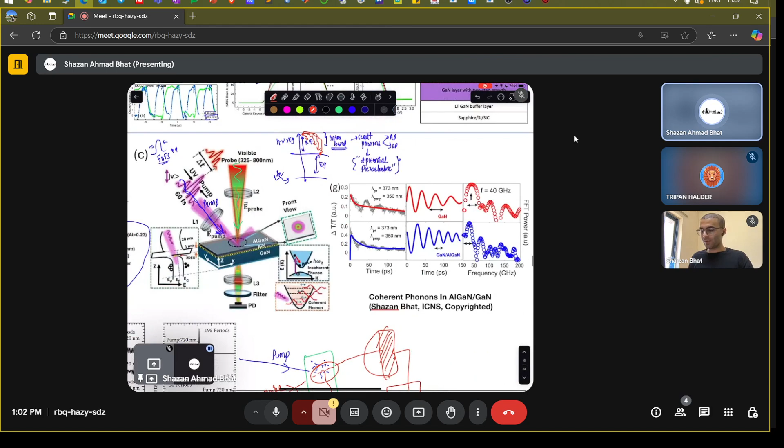Okay, just like this one example. This is something called a coherent phonon. This is what I actually work on. A coherent phonon is like a phonon, but it has a certain phase relationship. You see these oscillations; this is real experimental data from gallium nitride, and this is from gallium nitride and aluminum gallium nitride. These are the actual phonons you are seeing. These are quantum mechanical oscillations of the atoms taking place because of the irradiation of the pump, irradiation of some femtosecond light. And these happen to be at a frequency of 40 gigahertz.

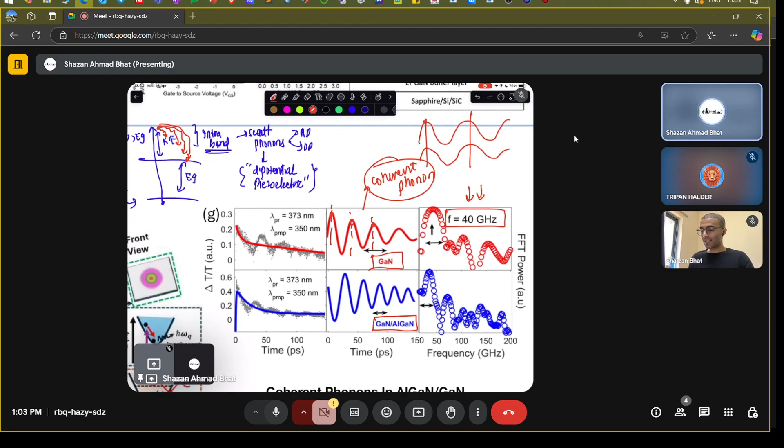And you can see clearly that there is a variation. So when I say coherent, coherent means that there is a certain phase relationship between these points. So coherent means if you have waves like this, these are coherent. There is a certain phase relationship. That is the essence of coherent phonons. And where we are going to use it, that is a separate thing that I'm not going to completely reveal, because it's an open research problem, and people are still working on it, and they have been working on it for a couple of years now.

And similarly, if you have layers of different materials, just like you have GaN, you have AlGaN, then GaN, repeating, you can basically create those phonons or certain oscillations in this pattern using the same technique. These are real phonon or quantum mechanical oscillations. Now, this is one aspect.

Now, what you do is you want to study these using simulations or theoretical models. For that, you have to go on to something called quantum mechanical simulations or quantum models. You have to solve the Schrodinger equation. I'm talking about the time-dependent Schrodinger equation. That basically looks something like this: iħ ∂ψ/∂t equals some H times, let's say, some ψ. This is basically something called the Heisenberg equation or whatever you call it.

You have to study the evolution of the time-dependent Schrodinger equation, and you have to consider the Hamiltonian by considering the electron-electron Hamiltonian, electron-phonon interaction, electron-laser interaction. You have to consider the phonon-phonon interaction in the Hamiltonian, and all of those things have to be considered in the quantum simulation. And this is quite computationally heavy. That's why people don't usually do it, because it requires, first of all, a lot of funding to get the servers, to get the machines, and then to start simulating these processes.

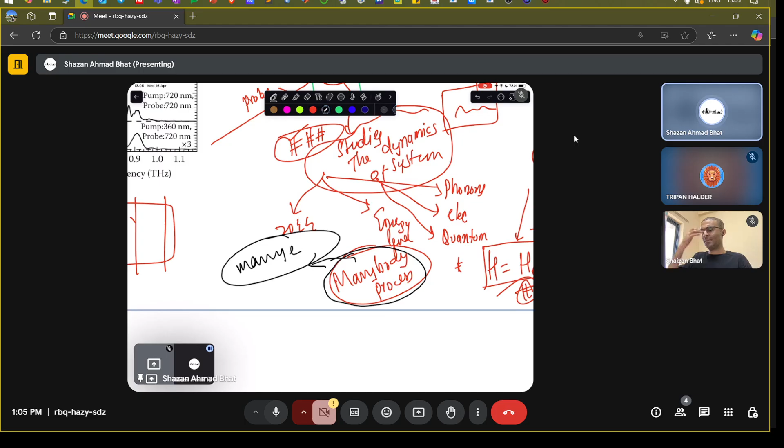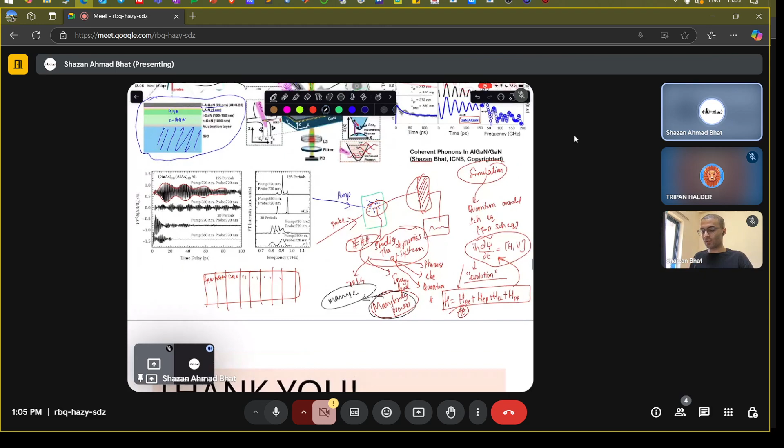It takes almost 36, 48 hours or 3 to 4 days to simulate a single process quantum mechanically, because these are included in something called many-body processes. Many-body process means that you don't have only one electron, you have many electrons, right? You are not talking about a single electron in a system, you are talking about billions and billions of electrons. So that's why you have to solve many-body equations using time-dependent density functional theories, Hartree-Fock models. I could talk about it for decades, but because of the limitation of time, that's the flavor I wanted to give you. What are the open research problems in these particular domains?